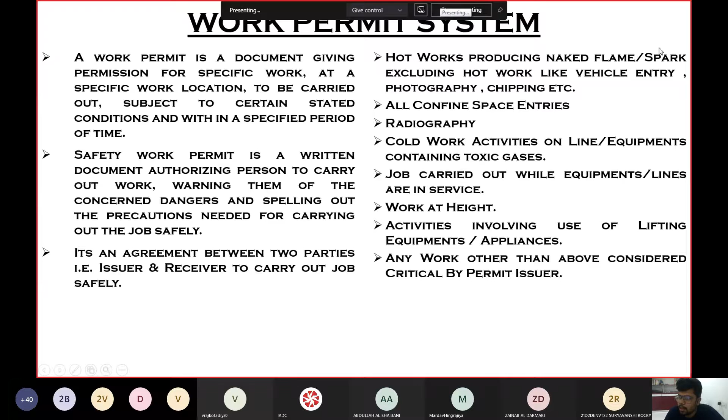So the samples which I have shown here are the samples of Saudi Aramco. At Saudi Aramco there are these types of permit: cold work, hot work, confined space entry, and equipment opening or line break.

They do not have this electrical isolation permit, but in India, in Reliance, in IOCL, we have only 4 types of permit. We do not have this permit of equipment opening and line break. We have only 4 permits: cold work, hot work, confined space, and electrical isolation. In India, these 4 permits are there.

In Saudi Aramco, or in the Middle East, except electrical isolation, they have a permit for equipment opening and line break. Yesterday, one of the participants mentioned in a message about lockout and tagout, which has to deal with your electrical equipment. I will cover that also.

A work at height permit will be considered within your cold work permit. Like in Jamnagar, Reliance, in the cold work permit there are some options, and in that there is a mention of work at height, scaffolding, construction. So you need to tick mark. If you are giving a permit for work at height, you need to tick mark that the person is going to work at height, or going to work on scaffolding. You just need to tick mark.

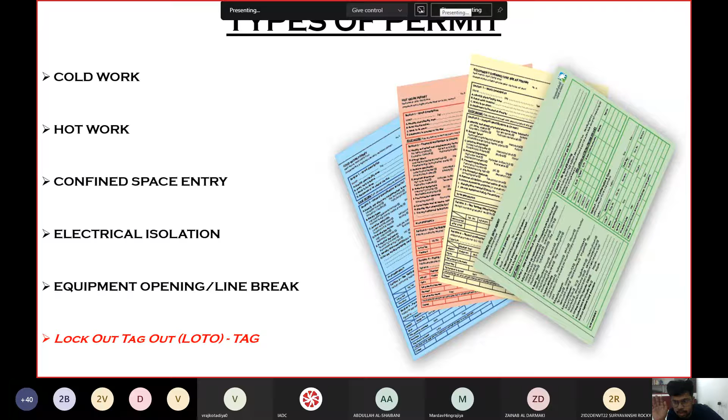So now this is confined space entry. Whenever you are going to enter into equipment, let's consider there is a shutdown in the plant. Whenever shutdown has happened in the plant, every liquid will be removed from all the equipment.

Let's suppose there is a feed surge drum which was filled with liquid. Because the plant has shut down, you need to empty this feed surge drum. Feed surge drum means from where you supply feed to the plant. There will be a tank or cylindrical vessel inside which your feed is filled up. So you need to empty out this entire vessel. First step will be you empty this entire vessel.

Second step will be you wash this vessel with water. Then you will wash this entire vessel with chemical.

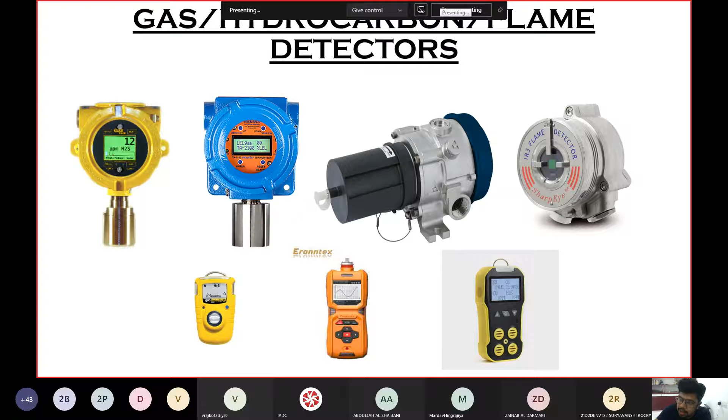Here is that. If you clearly see on this, the last one in yellow with 4 buttons, it is written EX, O2, CO and H2S - oxygen, carbon monoxide, H2S. These are written. So by using this multi-gas detector, you need to carry out your gas test.

With this gas test, you need to check whether minimum 21% of oxygen is there or not. It should be always above 21%. If it is 19 or 20%, then you need to keep this vessel open for a while, or perform some steam activities. You need to always ensure that your vessel should have minimum 21% oxygen.

After carrying out this gas test, if you are ensured that there is minimum 21% oxygen, now the equipment is ready for entry. For the first time, only the contractor will enter. You can see in this presentation that one person is inside the vessel.

What is the percentage of LEL? No, there should be no LEL, because we are talking about being entirely free of any poisonous gases, any toxic gases. Your vessel should be free of anything. LEL means lower explosive limit, so there should be no explosive gas inside your reactor. If it is showing some LEL, it means you have to perform the test again and carry out all the activities again. So there won't be any LEL. You need to check oxygen concentration.

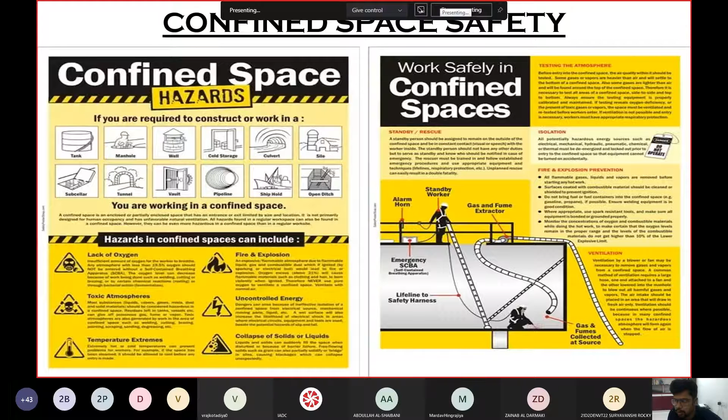I am not going to go into the detail of scaffolding, because there are technicalities also, like how many poles should be there, after this much height another ladder should be there. But we are only considering one stage scaffolding, with one platform and one ladder. So you need to verify and check the fitness of your scaffolding, and issue a cold work permit mentioning it is work at height and that scaffolding is going to be used.

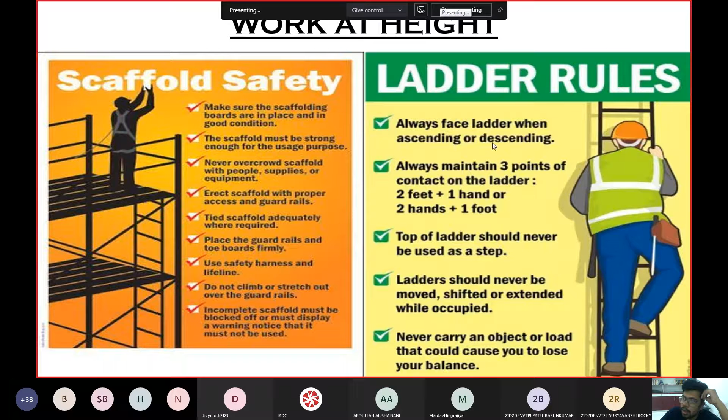Okay, now we will see the firefighting system. In this, you guys need to be very participative, right, this is quite interesting. Work permit, I understand you may not have that much knowledge about, but for firefighting, you can apply your logic as well. Now, how can fire happen?

So for fire, three things are always required: oxygen, heat source, and fuel. If any one of these three is missing, your fire won't happen. There should be a heat source, there should be oxygen, and there should be fuel. These three are mandatory requirements for fire to happen. Now, whenever you want to extinguish the fire, what will you try to do? Quickly put your answer in the message. Whenever you want to extinguish the fire, what will be your prime requirement, or what will be your prime motto? How do you extinguish fire?

Fundamentally, what will you do? I am not saying you will use fire extinguisher, or water. Cut the oxygen source. Anything else? Any other option?

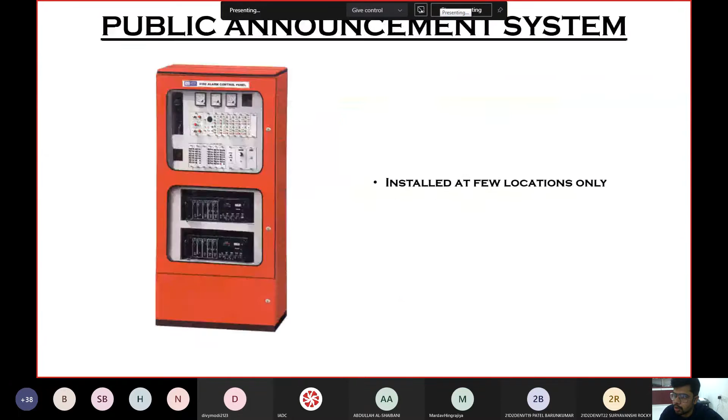This home in which I am living, last year only, after coming to this home, within one week a fire occurred in our kitchen. There was a fire due to the LPG cylinder. Fire was not on the cylinder, but my mother by mistake put the cooking stove on the pipeline of that LPG. So your burner is on top, and if your gas pipeline is below that stove, due to that the pipeline caught and was entirely cut off, and the LPG started coming out from there, and immediately there was a fire.

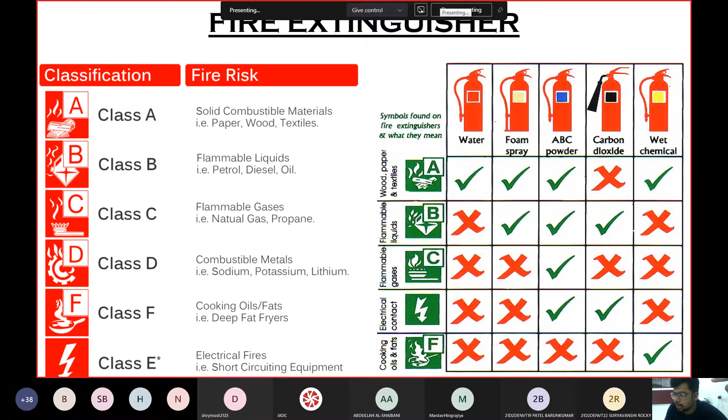Conventional cylinders were like that, you need to press the button with one hand. And once the powder is coming out of the cylinder, in one shot only you need to empty the entire cylinder. There is no coming back once the powder starts coming out, you just have to refill the cylinder. But nowadays, new generation cylinders are such that you can control them with the press button.

So try to remember this formula, that is PASS: pull the pin, aim at the base of fire, squeeze the lever, and sweep side to side. Always aim at the second option, that is aim at the base of fire. You need to put your extinguishing material at the base, not on the top. If your fire is there, you don't need to put it on top, always try to put it at the base. From the base, you need to remove the oxygen supply. From top, you can't do that, it will take time. So always aim at the base of your fire source.

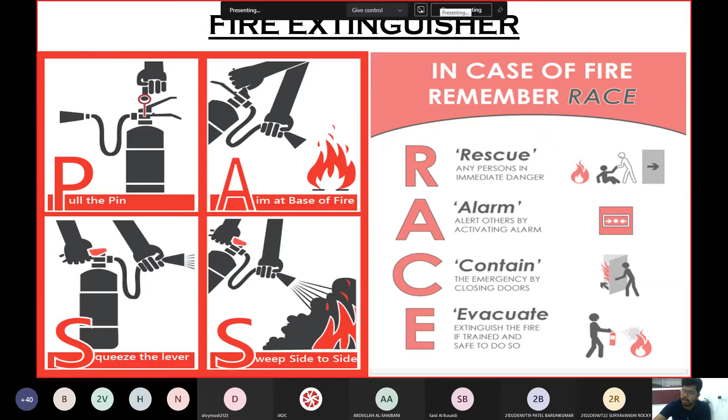Whenever there is a fire, due to temperature the glass will burst. Sometimes they have provided glass, and sometimes it will be connected with flame detection. But the problem with flame detection is that if your flame detector somehow goes faulty, giving a false indication, then also your deluge valve system will start, and the fire sprinkling will start. So normally there will be a glass bulb which will burst due to temperature, and water will start coming out and sprinkle onto the storage tank, pump, or equipment.

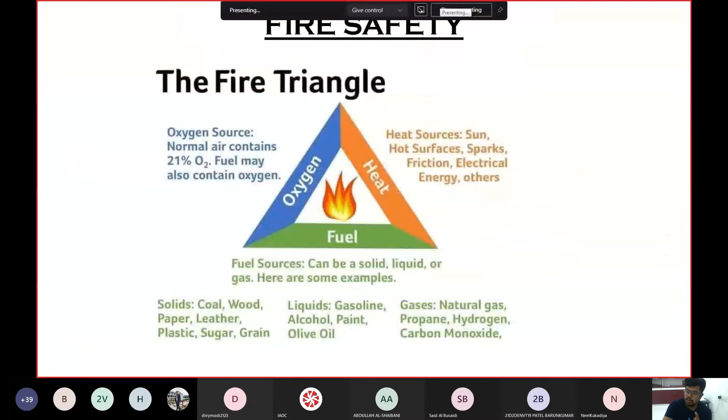So now for the firefighting system also we will show one small short video of about 2 minutes. In that you will see how you should hold the fire hose, how you should lay down the fire hose, how the water will start, how you connect that pump inside the hose, how the entire assembly works, and how the person is going to hold the fire hose. Let's see this, just give me a minute.

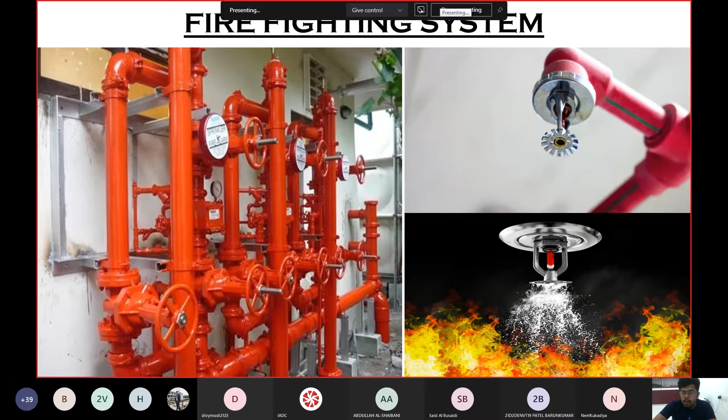You can see, one second. Can you see my screen, right? Anybody from IADC, please confirm you can see my screen. Yes sir, it is visible. Yeah.

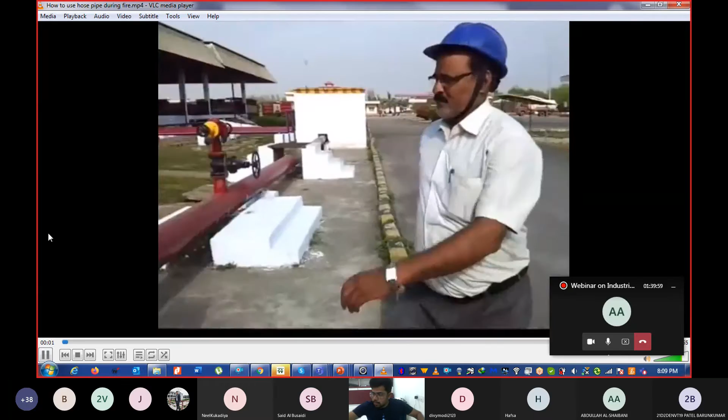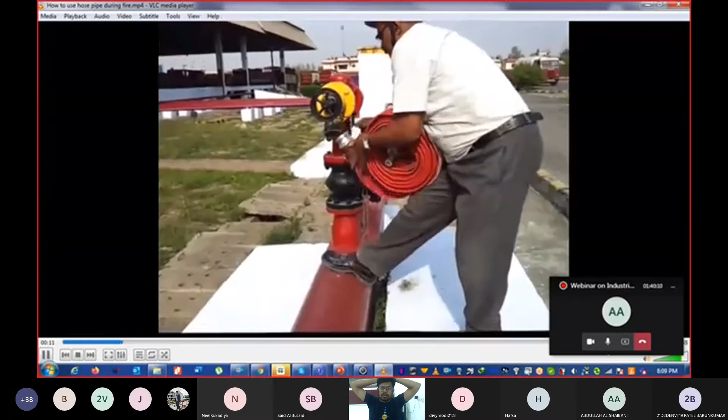This is how you should hold the fire hose. This is how you put it inside the fire hydrant. That is the fire hydrant, this is the fire hose.

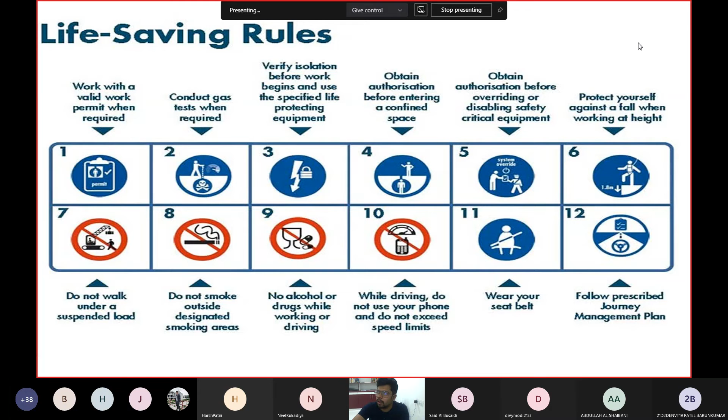One extra thing from my side: this is not related to this safety webinar or IADC—I have not even discussed this with Harsh, the organizer. Apart from whatever I am doing career-wise, I am also into personal and self-development. I am a certified neuro-linguistic programming practitioner—you can search what exactly that is. It has to do with how our brain functions, how our habits and behavior work, and I am certified to provide training on that also.